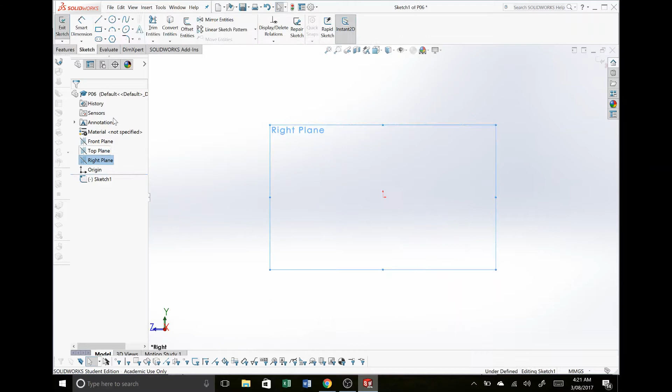And now let's sketch on our right plane. Right-click right plane. Select sketch. And I'm going to draw one circle, like we did on the first part, and I will dimension that to be 13 millimeters. So let's put a dimension on that. That's smart dimension, and we'll call that 13.

And we also want to put that hole through it. So remember on P02 we just drew one outside hole, we extruded it up, and then we cut a hole through. We don't really need to do that. That's more steps than we need. We can actually draw more of a donut shape in our sketch and tell it just to extrude the outside section of that donut, which is what we're going to do here.

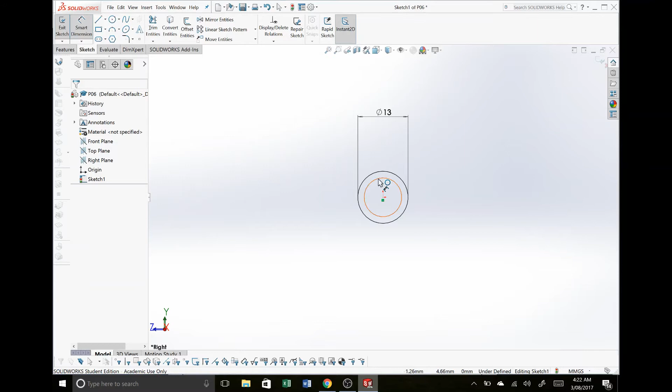Now we also want a hole. There's no dimension about the size of that hole, but again we've got an M10 bolt. Let's assume this bolt is going through the bush, because that's generally how these things work. And we'll just make it a 10 mil hole so that it's big enough to fit that 10 mil bolt. So again, grab a circle. First click is on the origin so that it's nice and locked down. Second click is the outer section of the radius. Select my smart dimension. And then place a 10 mil dimension across that bush.

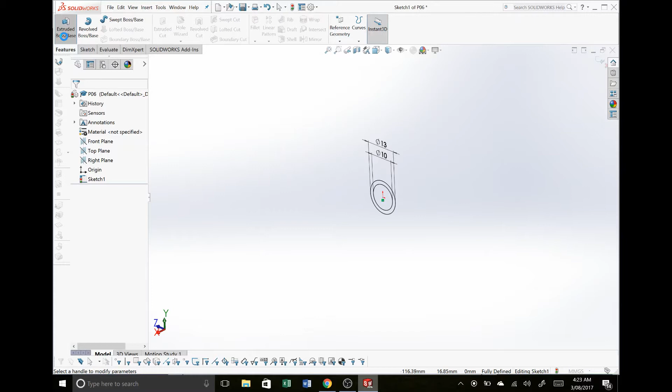Alright, and now I'm going to hold down the scroll wheel and move my mouse. That allows me to orbit into more of a 3D view. I will now come to Features, Extruded Boss/Base, and we should see SolidWorks automatically select that donut shape. It's pretty smart. It can normally guess what we're trying to do. Under Direction 1, I'm going to change to Midplane. Now there's no real reason why that would make the part work. It's not a critical step, but it does make our model a lot nicer in that it keeps our origin nice and centered within our geometry. That can be quite a nice thing later when we go into making assemblies, to have all our planes aligned around the center of a component.

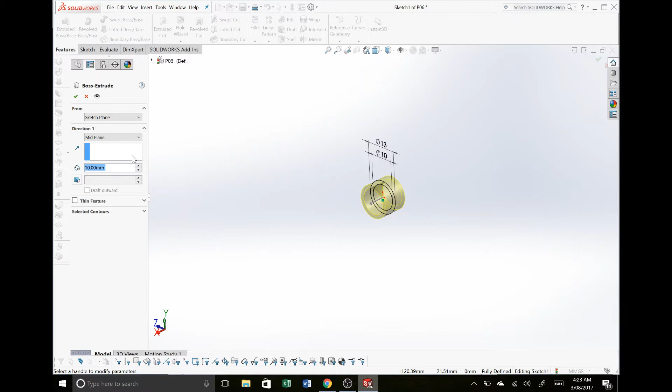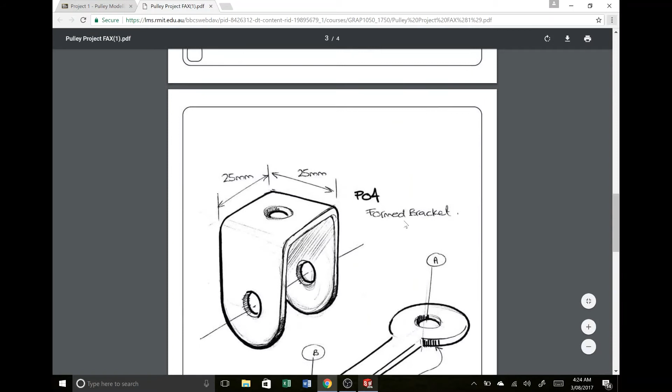Alright, we want to know how wide this is. There's actually no dimension written there. Let's have a look if we've got anything that tells us how wide our pulley is. It looks like the widest point of the pulley, where it's passing through the wheel, is 25 millimeters. Let's assume that's where the bushing's going to go. That's the perfect sort of place for a bushing. So let's make that bushing 25 millimeters wide. And we'll hit the green tick. And there I have the first part of that bushing. So let's see how that's looking. That looks pretty good to me. So let's hit Control S and save.

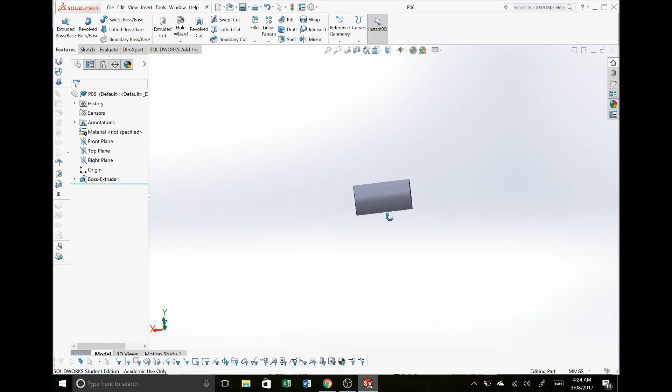Typically on a bushing you'd have a bit of a leading edge as well. It doesn't have it on the drawing, but we could add it ourselves. So if I want to put a leading edge on this, that's something to help locate it into what would normally be a very tight cylindrical surface that it has to locate into. We'd want some kind of a chamfer. So I'm going to come to my fillet feature and I'm going to select chamfer. I'm going to put it to something very low.

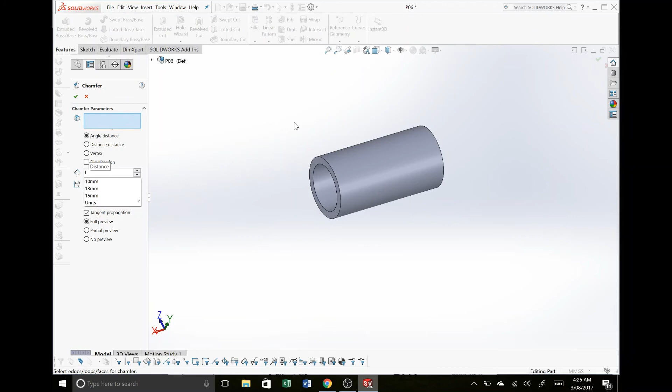It probably only needs to be about a 1 millimeter chamfer, and I'm going to apply it to the outside at each end of my bush. So that's fine. 45 degrees will do. Hit the green tick to say that's all fine and okay. Hit save, and there we have a finished bush. Very good. You can move on to your next part.